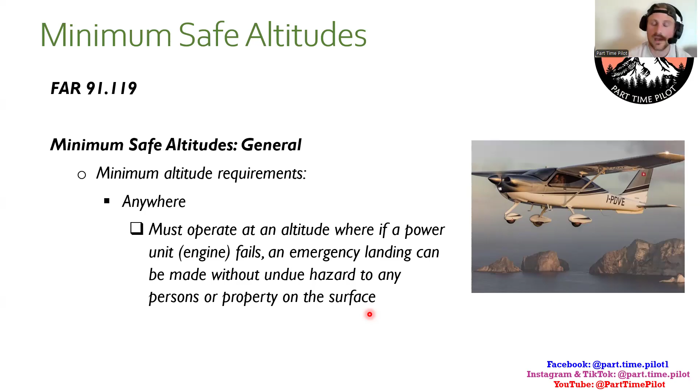And airplanes have glide ratios - every airplane has a different glide ratio. It tells you how far, horizontal distance along the ground, you can travel for each foot you drop in altitude with no power. So you can know that glide ratio - okay, if I'm flying over the city here, I need to be able to glide 2 miles to get outside the city and land safely in a field or something in this area of my cross country plan. So that means I need to be at this altitude to be able to glide there. You can plan ahead like that to meet this requirement.

So I'm going to fill in this picture as we go along. We have open water over here - this is my little drawing of the ocean. We have a little city here, so that's like a congested area. We have an open assembly of people up here on this hill - they're just gathering for a family get together or something. Then we have sparsely populated, where it's just maybe one house, a farmhouse or something, and maybe a vehicle here.

So this person's just flying anywhere, right? Their engine's on fire, they've lost an engine. So you must be at an altitude where you're able to navigate, so you're not hitting vehicle, structure, open air assembly, congested area, any of this stuff. Whatever altitude you need to be at to be able to land safely and not cause any harm - that's the overarching rule there.

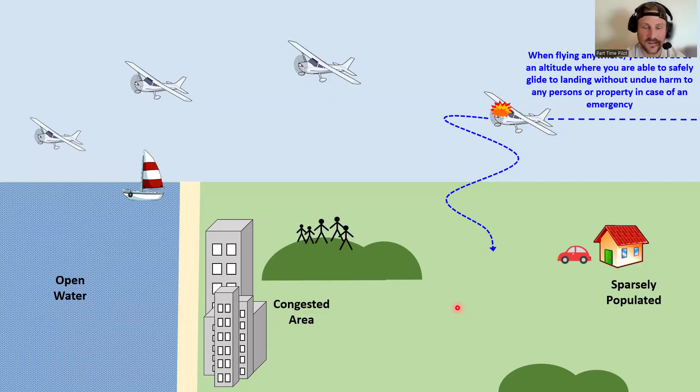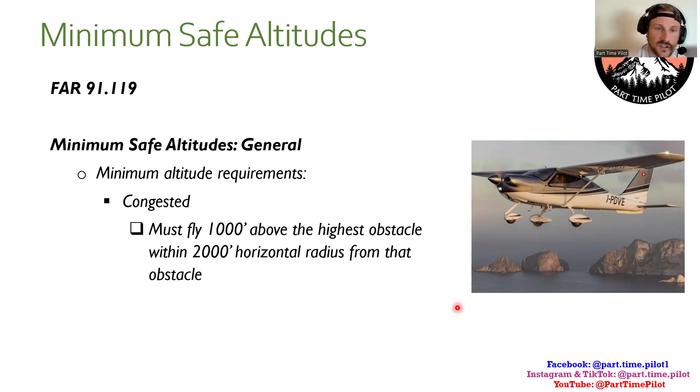All right, then we have congested area. You must fly 1,000 feet above the highest obstacle within 2,000 feet horizontal radius from that obstacle. So if your course takes you within 2,000 feet, which is about a third of a mile of an obstacle, you need to be 1,000 feet above or higher. An easy way to plan this is just to plan to always be at least 1,000 feet over the highest obstacle anywhere near your route.

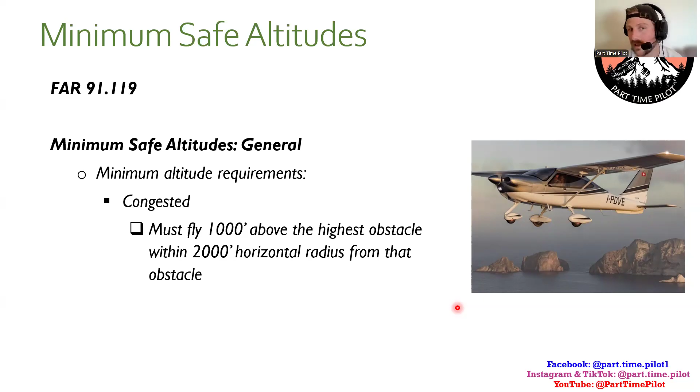When you're looking at your aeronautical charts and draw your route for your cross country plan, each grid lists the highest obstacle or terrain altitude, plus a couple hundred feet - it kind of rounds up. I can't remember the exact way they round up, but we have that listed in the course. You can use that altitude to be safe, or you can look through the obstacles along your route and make sure you're 1,000 feet above. That's an easy way to meet this, but it applies when you're within 2,000 feet horizontal radius of that obstacle - all the way around it, you've got to be 1,000 feet above it.

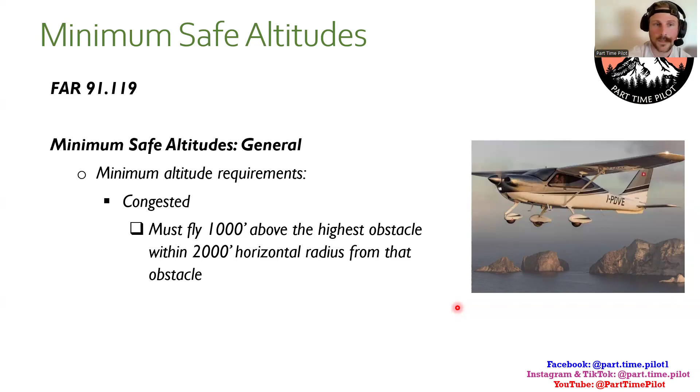So that's congested areas - congested areas, open air assembly of people, or like a city or town. You've got to look at this as if it was 3D. So if we're flying at the height of this building, or plus or minus 1,000 feet of the height of this building or these people, and we're 2,000 feet from it, then we have to go 1,000 feet up. If we're flying within 2,000 feet of these people, we've got to be 1,000 feet above them. If we're flying within 2,000 feet radius of this building, then we've got to be at 1,000 feet above that, up here where this aircraft is.

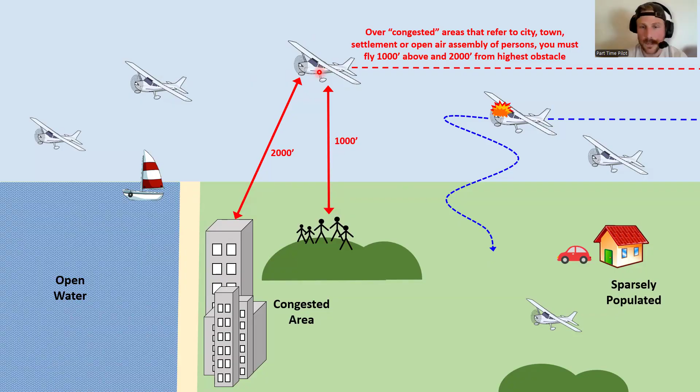All right, the next one is other than congested. You must fly no lower than 500 feet above the surface unless you're over open water or a sparsely populated area. So you cannot fly lower than 500 feet above ground unless you are over open water or a sparsely populated area - then you can.

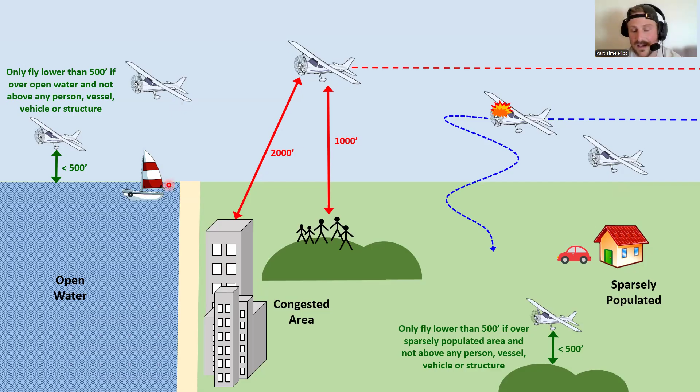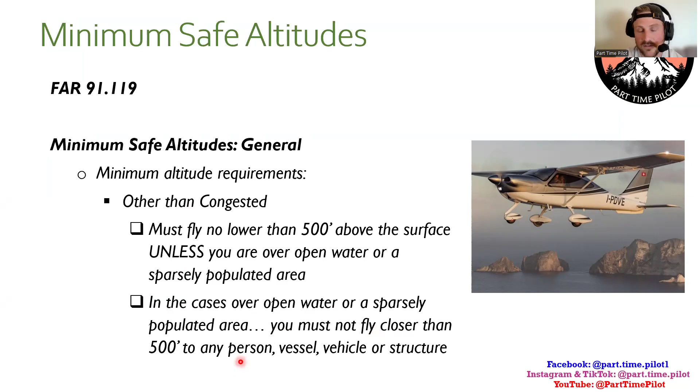Same thing if we're over open water and there's a vessel like a boat - then you've got to be 500 feet away in any direction from that boat. You can't just whiz by 100 feet from this boat and scare the bejesus out of them - you have to be 500 feet away. That's only when you're in open water or a sparsely populated area, talking about structures, vehicles, vessels, or people. And if you're over open water or sparsely populated area but not near those things, then you can fly below 500 feet.

But again, you have to make sure that if your engine cuts out, you can safely land without undue hazards to any people, buildings, anything like that.

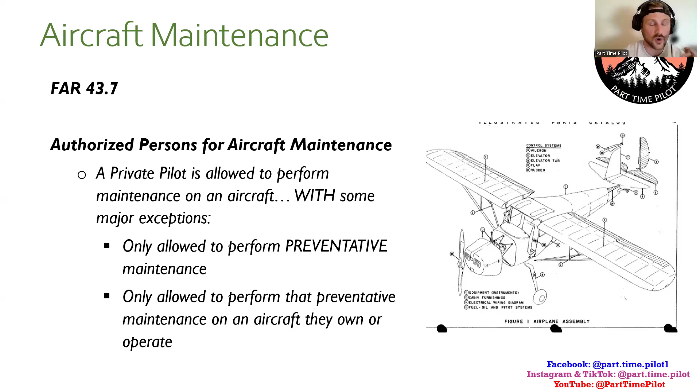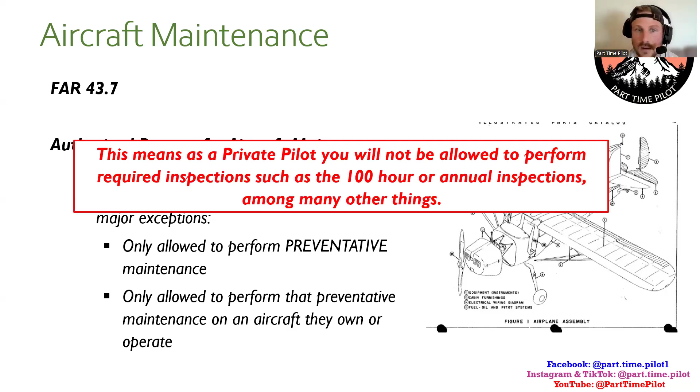So this is from FAR 43.7, authorized persons for aircraft maintenance is what I want to talk about first. A private pilot is allowed to perform maintenance on an aircraft with some major exceptions. One, you're only allowed as a private pilot to perform preventative maintenance, so the key word here is preventative. And you're only allowed to perform that preventative maintenance on an aircraft that the private pilot owns or operates. This means as a private pilot, you will not be allowed to perform required inspections such as the 100-hour or annual inspections, among many other things, and we'll get into that.

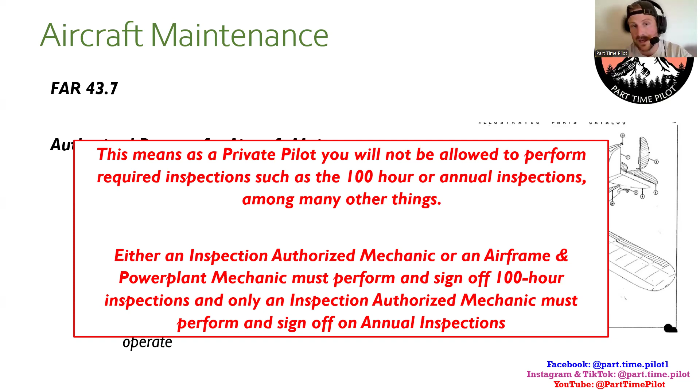Either an inspection authorized mechanic or an airframe and powerplant mechanic must perform and sign off on 100-hour inspections, and only an inspection authorized mechanic must perform and sign off on annual and other annual inspections. There's also other inspections that require a mechanic—100 hours, annuals, airworthiness directives, and the avionics inspections like the VOR and the transponder checks. They require the appropriate notation and signature in the aircraft maintenance records by these certified mechanics. So a private pilot can't do those sort of inspections. It has to be a certified mechanic, and there's specific certified mechanics that you can see for either the annual or the 100-hour.

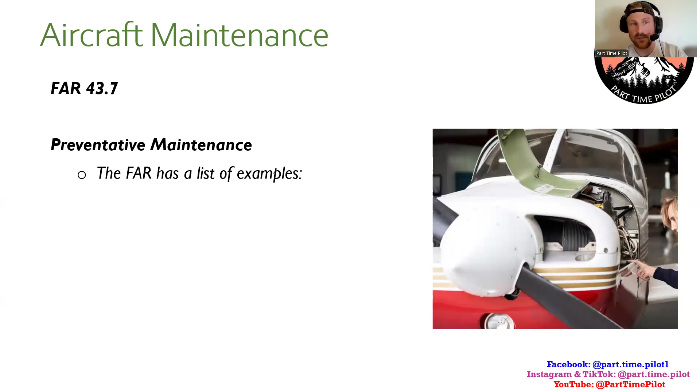So preventative maintenance—what can a private pilot who owns or operates their own aircraft do in terms of maintenance on that aircraft? Well, they can do preventative maintenance. So what is that? FAR 43.7 lists a lot of examples. You do not have to memorize this list, I don't want you guys to think that you have to memorize this list. The FAA Written, to my knowledge, doesn't ask a ton of questions on this. But for your check ride, you might get an oral exam question that says, can you do maintenance as a private pilot? And you would say, well, I have to own or operate my own aircraft, but if so, I can do preventative maintenance. And then the examiner might ask, well, what are some examples of preventative maintenance, or what is preventative maintenance? So maybe if you kind of get a general idea, maybe give one or two examples for your check ride, that's all you need to do. You don't need to memorize all of these—you can just say, well, I can look that up in 43.7 for the complete list of examples.

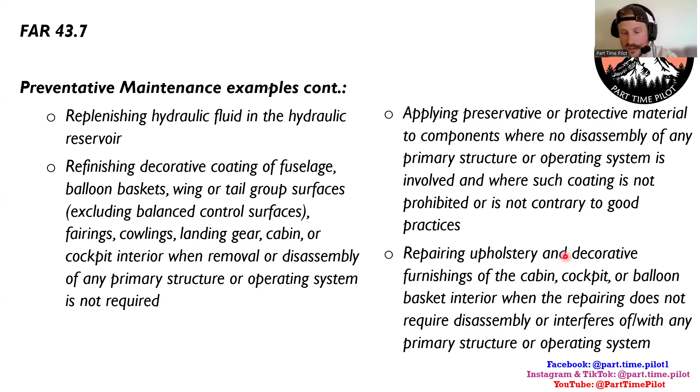I'm not going to read all these off, but these are all listed in 43.7. So I'll just read off some examples: removal, installation, and repair of landing gear tires, servicing landing gear wheel bearings such as cleaning and greasing, replacing safety wire or cotter keys, lubricating which does not require disassembly—this is a key word you're going to see over and over again, not requiring disassembly or removal. Simple fabric patches, replenishing hydraulic fluid, refinishing coating on fuselage—again, doesn't include disassembly of any primary structure or operating system. Applying preservative and protective material, repairing upholstery, making small simple repairs to fairings—again, no changes that change contour and don't interfere with proper airflow.

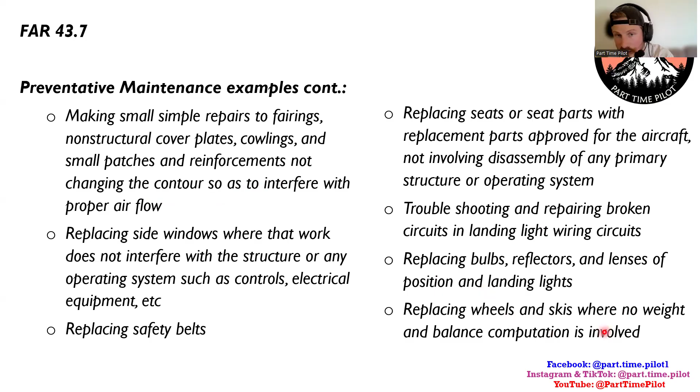Replacing safety belts. Replacing bulbs, reflectors, and lenses in position and landing lights. Replacing wheels and skis where no weight and balance computation is involved. That's another key one—you can't change the weight and balance computation when you make these changes.

Replacing any hose connection except hydraulic connections. Cleaning or replacing fuel and oil strainers or filter elements. And you can also obviously refill the oil and check the oil.

Updating of GPS database—this is a big one, a common one that a lot of private pilots who own and operate their own aircraft will do. Replacing and servicing batteries. So you get the idea. None of this is like taking out a box or an instrument, or disassembling it, tearing anything down and building it back up, unconnecting wires or anything like that.

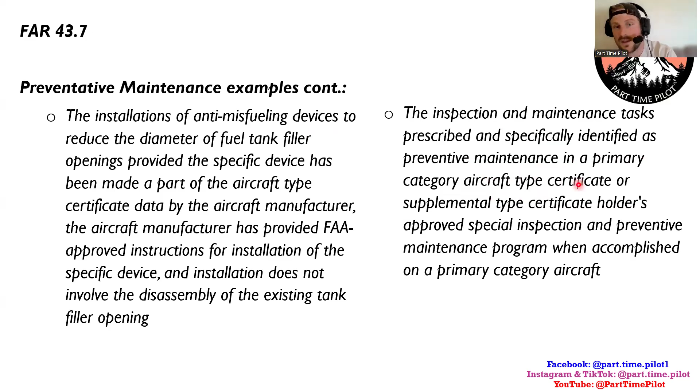The installation of anti-misfueling devices, and inspection and maintenance tasks that are prescribed and specifically identified as preventative maintenance in a primary category aircraft type certificate. So if it's listed as preventative maintenance in the type certificate for the aircraft—this is an interesting one.

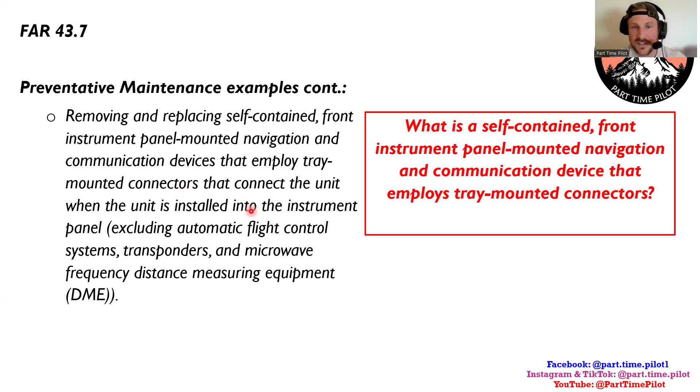Removing and replacing self-contained front instrument panel-mounted navigation and communication devices that employ tray-mounted connectors that connect the unit. That's a lot of words to describe one thing. So what is a self-contained front instrument panel-mounted navigation and communication device that employs tray-mounted connectors? Well, this is like some communication or navigation device, like a radio or transponder, that literally just pops in and out.

You can just eject it, take it out, and replace it with a newer model or one that actually works if it's broken, and just pop it back in. So something like that, where the only action you're doing is popping it out and popping it back in. It's panel-mounted and employs tray-mounted connectors that connect the unit when it's installed. That's how I think of it.

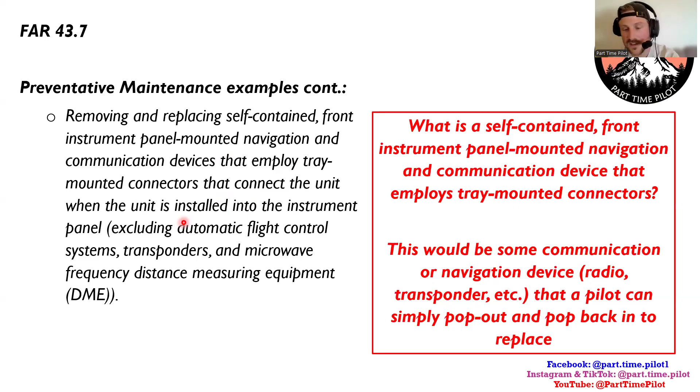One example missing from the FAR list that is known as preventative maintenance private pilots who own or operate their aircraft can perform is adjusting the zero indicator on the vertical speed indicator. This could be a question you get—I've seen practice questions asking what's the one instrument a private pilot can adjust. They don't always mention you have to own or operate your aircraft, but it is the vertical speed indicator. What happens is sometimes this needle will hang.

It could go up as well, but it'll most likely hang when you're on the ground—obviously you're not climbing, you don't have a vertical speed while on the ground. So you need to re-zero it before you take off. There's a little knob which you can turn with a screwdriver, and you spin it to bring that needle back up and zero it out.

That's something you can do because it's right out here—it doesn't require taking the instrument out, disassembling it, taking the faceplate off, or messing with the back of it. You just take a little screwdriver, spin that, and it moves the needle up to zero it. That's something a private pilot who owns or operates their own aircraft is allowed to do as preventative maintenance.

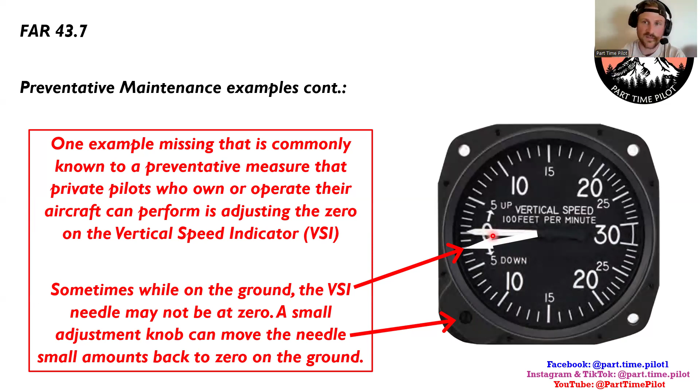All right, continuing on, let's talk about the logbook entry. We've got an aircraft maintenance logbook here for preventative maintenance. So if you're a private pilot who owns your own aircraft and you do preventative maintenance, you have to log it in the maintenance logbook, including a description of what you did, date of completion, and signature, certificate number, and kind of certificate of the person who performed the work. This logbook entry and signature returns the aircraft to service, and the ultimate responsibility for ensuring the appropriate entries are made lies with the owner or operator of the aircraft.

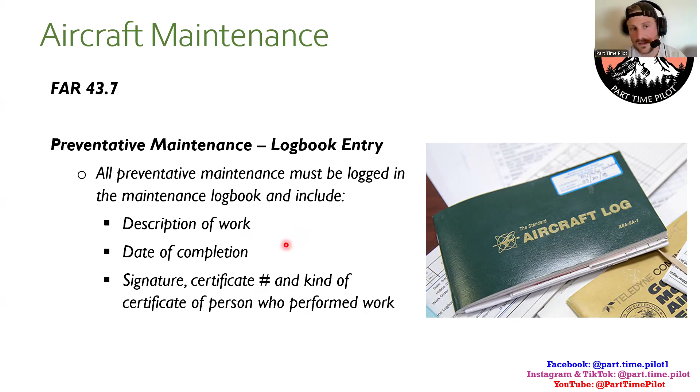So, description of work, date of completion, and signature, certificate number, and kind of certificate of the person who performed the work. The person responsible is whoever owns or operates the aircraft. So in this example, the person responsible for making sure this logbook entry is made would be you.

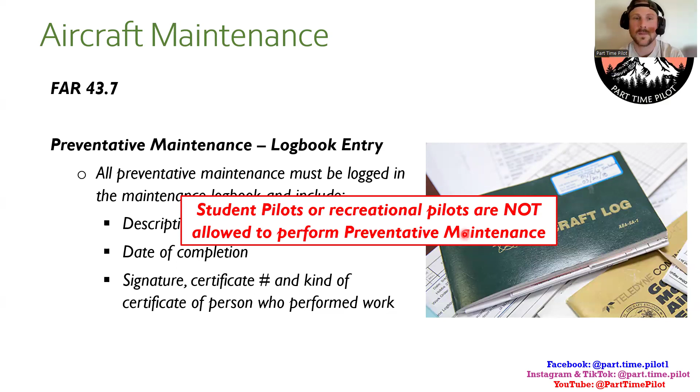Student pilots or recreational pilots are not allowed to perform preventative maintenance. So it has to be a private pilot or commercial pilot certificated person. I believe sport pilots can do it as well, but don't quote me on that.

Any questions you guys have on maintenance, or even before on minimum safe altitudes? If not, no worries, I'll give you guys about a minute or so, just to see if anything comes to mind. If it comes to mind later, no worries, just drop it in the chat.

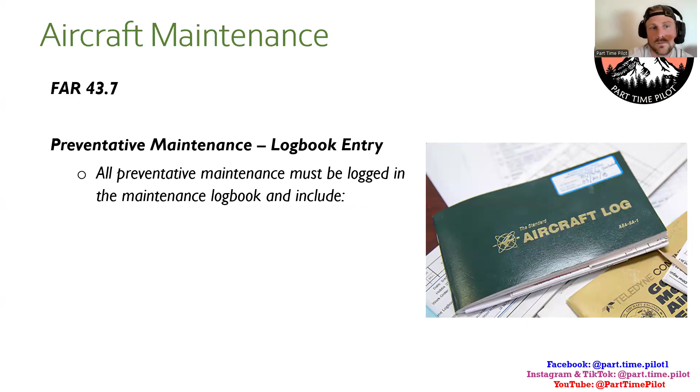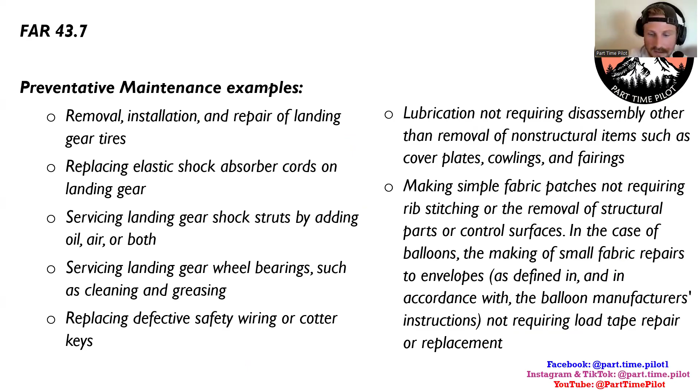A lot of these are, this is one of the most confusing FARs I've found, a lot of questions come up like on Facebook groups and things like that because it's kind of vague. They just say a private pilot can do preventative maintenance if they own their own aircraft, and then they give these examples, and that's pretty much it. They don't really give a specific guideline. But let's see what it actually says about oil.

Cleaning or replacing fuel and oil strainers or filter elements. So I would say... I'm not a big mechanic gearhead type, so I don't even know how to do my own car oil. I always get that done for me, but I don't know what's involved in doing your own oil.

Yeah, so you can change the filter. I guess if you can refill it and change the filter, if that's all that's involved in changing the oil, as long as you're not having to disassemble anything, I would say yes. Good question.

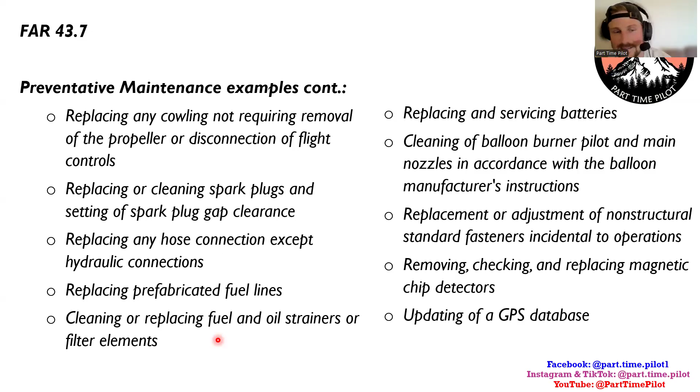Give it about a minute, see if anyone has any other questions. All right, so ChatGPT says that it includes replacing engine oil. Yeah, ChatGPT can be wrong, but that fits with what I believe, so I'm gonna say yes. All right, we'll move on. Again, if you have any questions, just drop them in the chat.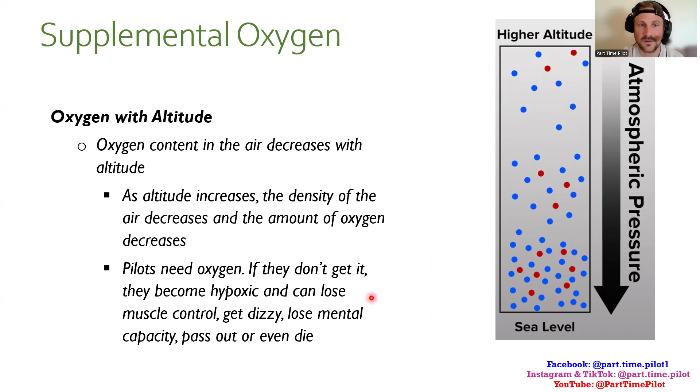A pilot needs oxygen. If they don't get it, they can become hypoxic and can lose muscle control, get dizzy, lose mental capacity, pass out, or even die. We talk about this in the human factors section of our course, which we'll get to later. We talk about hypoxia and all the dangers that come with it.

There's different things that can cause it. There's high altitudes where the oxygen is just lower, there's cold temperatures, high G forces, alcohol consumption or drugs. There's a lot that can affect the transfer of oxygen through your blood to your heart and lungs and your cells, and that's what makes you hypoxic. So literally just being at high altitudes can make you hypoxic.

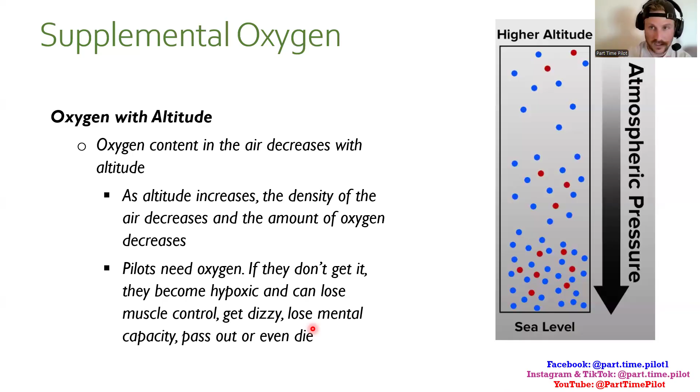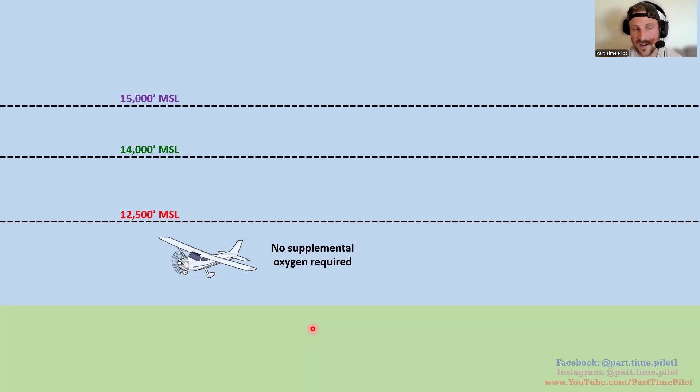So the FAA has rules for certain altitudes to require pilots to bring oxygen with them to breathe, like an oxygen mask. So what are these altitudes? There's three distinguishing altitudes that the FAA talks about: 12,500 feet, 14,000 feet, which is this line here, and 15,000 feet, this line here.

Below 12,500 feet MSL, no supplemental oxygen is required. However, even though it's not required, it doesn't mean that if you're flying at 12,000 feet, 11,000 feet, 10,000 feet, 9,000 feet, that it's not a good idea to have supplemental oxygen with you.

Most general aviation aircraft have service ceilings around 10,000 feet, and you may probably never get up that high, you may fly 6,000 feet. So if you're doing that, you probably don't need supplemental oxygen, but if you go higher than 6,000 feet, it gets considerable.

You can actually tell if you've ever been that high, like on a mountain hike, or in Mile High City in Denver. I used to play basketball games, and when we played in Denver, I got tired much quicker. It's a real thing, because there's less oxygen.

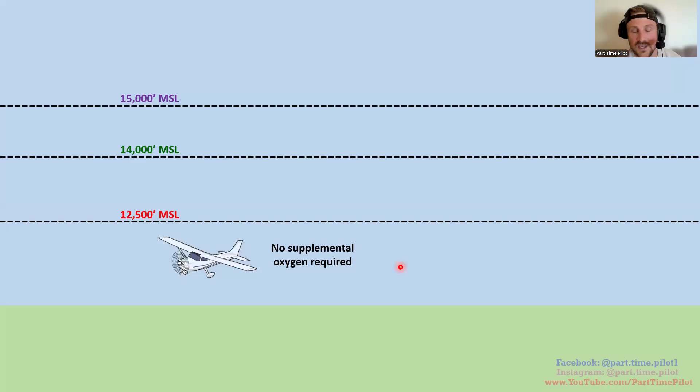Just because the FAA doesn't require it doesn't mean you shouldn't bring it along to be safe. It's another thing to do to go the extra mile and be extra safe in your aircraft. So if you plan on flying even above 5,000 feet, just buy a little supplemental oxygen. They even have these little cans you can suck in if you need it. I would highly recommend it.

Between 12,500 and 14,000 feet, the rule is that the required minimum flight crew, after 30 minutes, must have supplemental oxygen. So say you climb above 12,500 feet at 2pm and level off at 13,000 feet - you're within this band. At 2:30, after 30 minutes in this band, the minimum flight crew is required to have supplemental oxygen for the rest of the time you remain there. But for the first 30 minutes, if you climb to 13,000, fly there for 20 minutes, and drop back down, technically you wouldn't need it - it wouldn't be required. I wouldn't recommend that, but that is the rule.

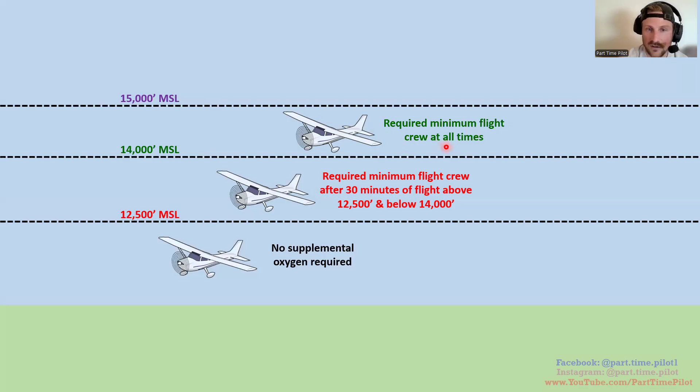Between 14,000 and 15,000 feet MSL, the required minimum flight crew must have oxygen at all times - there's no 30-minute buffer. As soon as you climb above 14,000 feet MSL, all required minimum flight crew has to have supplemental oxygen.

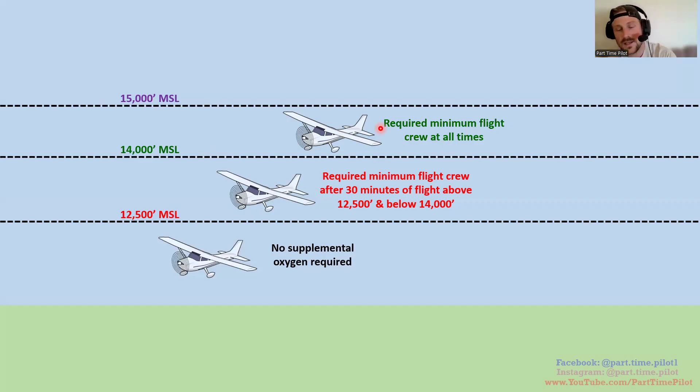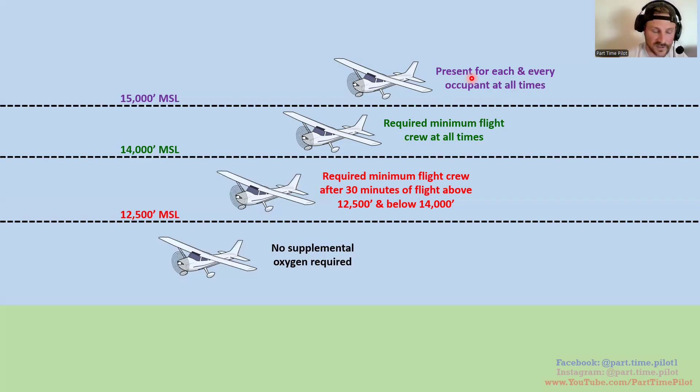Above 15,000 feet, oxygen has to be present for each and every occupant at all times, not just the flight crew. The flight crew has to use it above 15,000 feet, but all occupants and passengers have to have it present for them to use. They're not required to use it, but they have to have the ability to. That's why on airliners they have oxygen masks that drop in case of emergency.

Airliners and pressurized aircraft have a bit different rules, which you'll cover in IFR and commercial certificates - we're not going to talk about that here. We'll keep it simple and assume you're not flying in pressurized aircraft. Because they pressurize it and pump oxygen in, the rules are a little different for them. That's why they have oxygen at each seat on an airline.

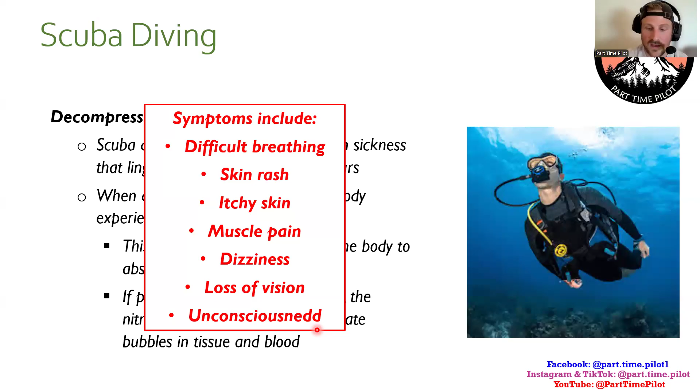It's not exactly a regulation, the scuba diving part. It's more of a recommendation that the FAA gives in the Aeronautical Information Manual, the AIM. Because of decompression sickness, the AIM recommends a pilot or passenger who intends to fly after scuba diving should allow the body sufficient time to rid itself of excess nitrogen during diving.

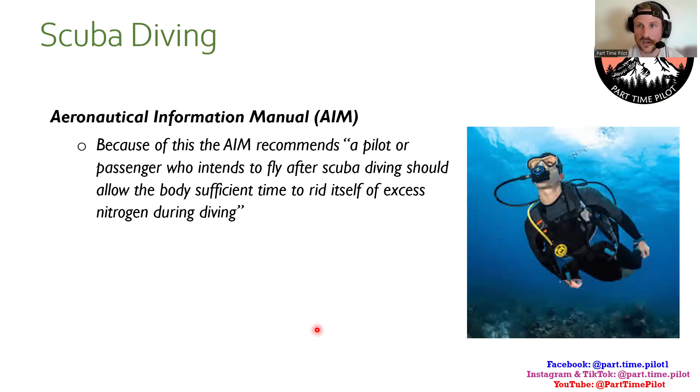So what do they recommend? The FAA recommends you wait a certain amount of time after scuba diving before flying. If a dive does not require a controlled ascent — no decompression stops — and your flight is at or below 8,000 feet, they recommend you wait 12 hours.

If the dive required a controlled ascent, meaning it needed decompression stops because it was deeper and more dangerous, and your planned flight is below 8,000 feet, you need to wait 24 hours. That's because a controlled ascent means more nitrogen built up, so you need to wait longer. And no matter whether it was a decompression stop dive or not, if you're flying above 8,000 feet, since the oxygen and pressure changes are significant that high, they still recommend waiting the full 24 hours.

All right, let's open it up to questions — anything you guys want, it can be on stuff from today. We finished kind of early; got to get better at judging how long these are going to take. I guess it depends on the questions, so that's kind of hard to judge. I'll let you guys think of any questions you might have. I'm here for the next 25, 30 minutes for you. So any questions you have, pull up your course, look at the past lessons you've done, maybe something you wrote in your notes that you couldn't figure out. I'm here.